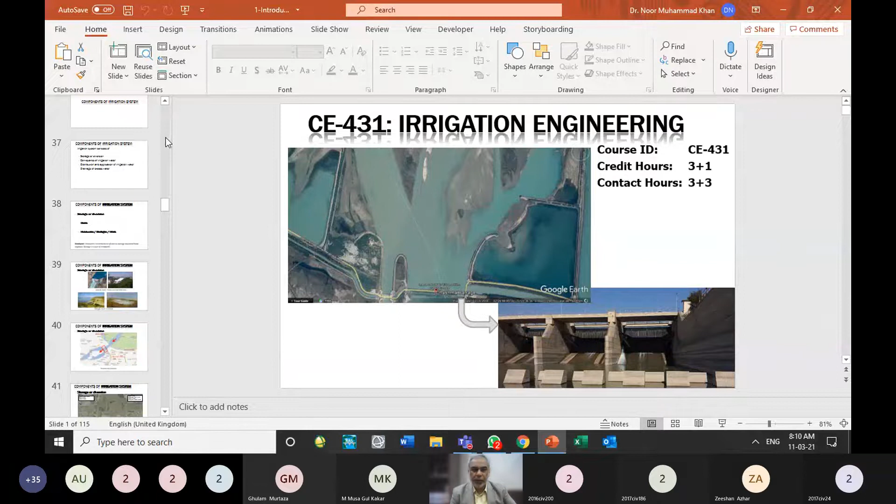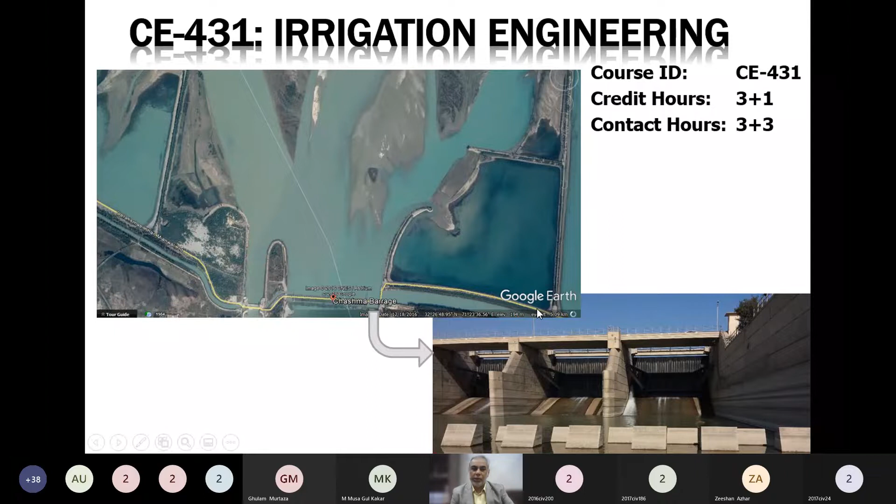Up till now we have focused on the importance of irrigation. We have tried to inform you, and we have linked irrigation with the economy of the country, with the need of the society, with the need of the population living in a country with respect to their food requirement, their fiber requirement, and their clothing requirements. So we need agriculture. Agriculture can survive if sufficient water is available. If sufficient water is not naturally available, we have to go towards irrigation, which we define as artificial application of water.

We have informed you why irrigation is required in a systematic manner. Main reason is for sustained growth of agriculture, and why we need it. Reason is non-uniform rainfall with respect to time and with respect to location.

We have told you that irrigation is provision of water, and provision of water...

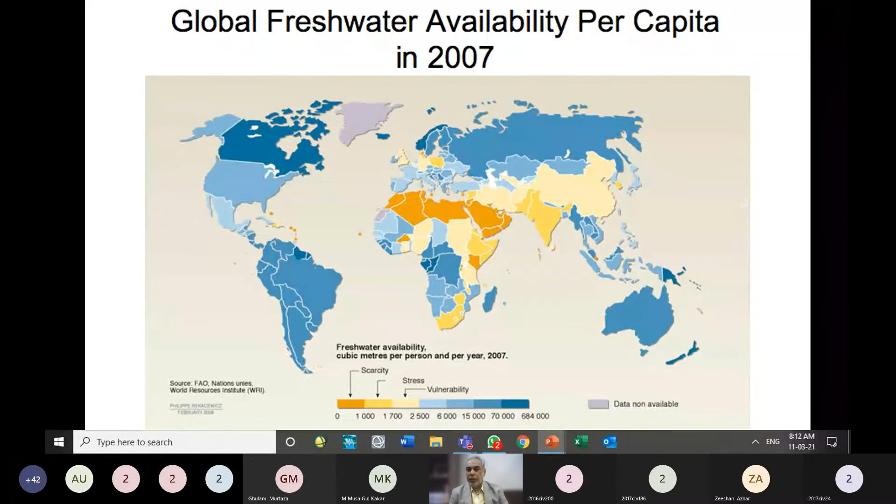So we have informed you that irrigation depends upon water, and water is not available in unlimited quantity. It has a limited quantity. So we have to be careful while using water for any purpose, not only for agriculture purpose.

We have also informed during the discussion that there are three main stakeholders. We have told you that there are three main sectors in addition to the fourth sector of environment. There are three main sectors which are users of water: agriculture, urban water supply, and the third one is the industrial sector.

So each sector needs to look into careful use of water, so that water should not be wasted. In the urban supply sector, you can see our habits of using water without considering its value for the person who is short of water. We keep our taps open while doing other work. We keep our lawn pipes or lawn hose open without taking care that we are using fresh water, which is not easily available to a big population of the world.

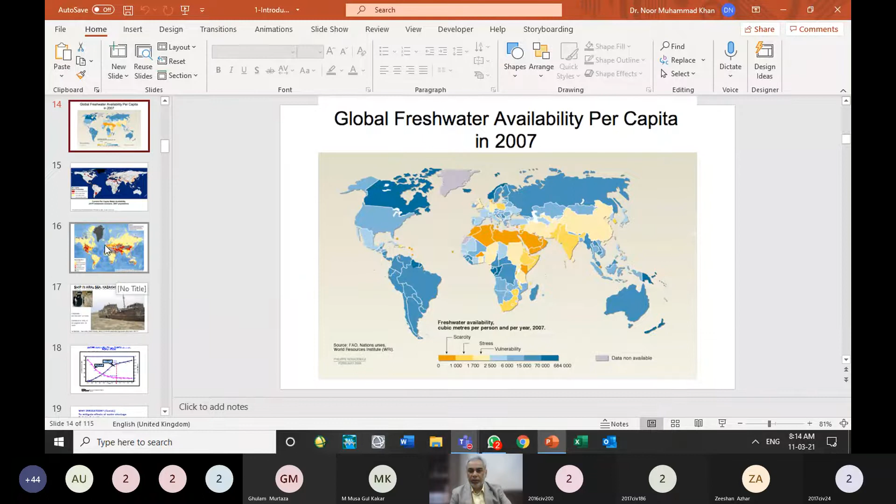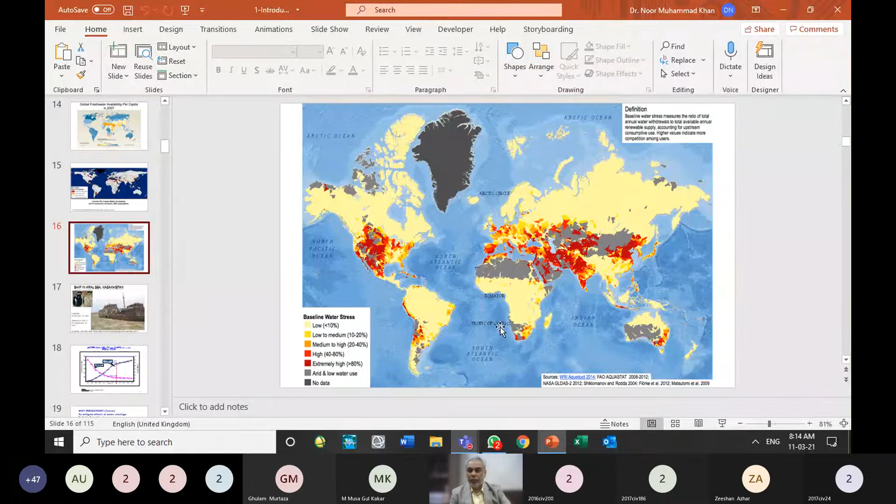So we should be careful in our daily life. We should be careful as a nation also. We should not be losing water. Wherever possible, we have to conserve water. We have to reduce our demands, because unlimited supply of water is not possible. There is a limited supply of water. You were informed about the habits of using water all across the world. For example...

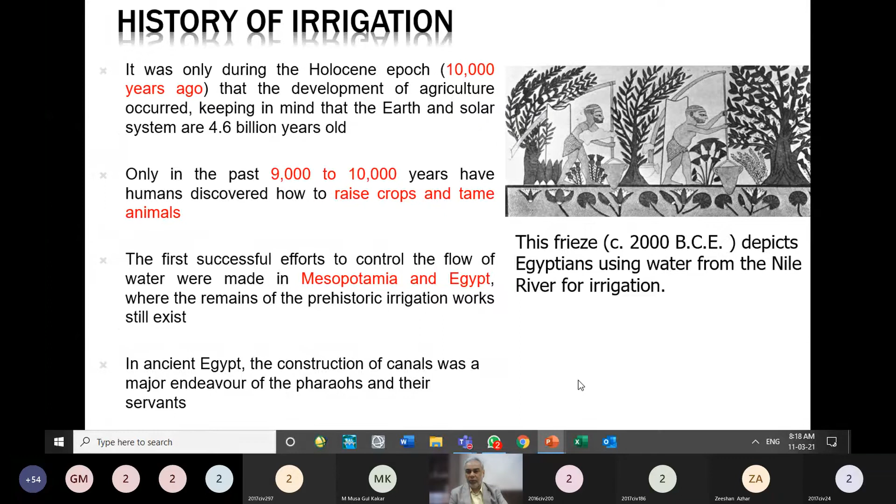So those were the messages conveyed in the last 2 weeks, and you were informed about merits and demerits of irrigation. Historically, a small review was carried out that informed you irrigation came into existence once agriculture was practiced, and after that, when they found agriculture cannot sustain without nature, without application of water, they went towards irrigation.

So when they thought about irrigation, they had to divert water and make canals. Historical findings tell us some civilizations stopped the river, stored the water, and diverted it into canals - we consider that a way towards the irrigation system. Those historical facts - where was the first dam constructed, who were using canals - have been informed to you. We have found old civilizations like Egyptian, Mesopotamian, Indus Valley, and civilizations in China and other countries had started using methods of irrigation as old as 4,000 years from now.

We have found evidence of using Qanat irrigation system as old as 700 BC, about 2,700 years ago. You have been informed that people were using canals and dams for diverting water. Canals and dams were built as old as 4,500 years ago.

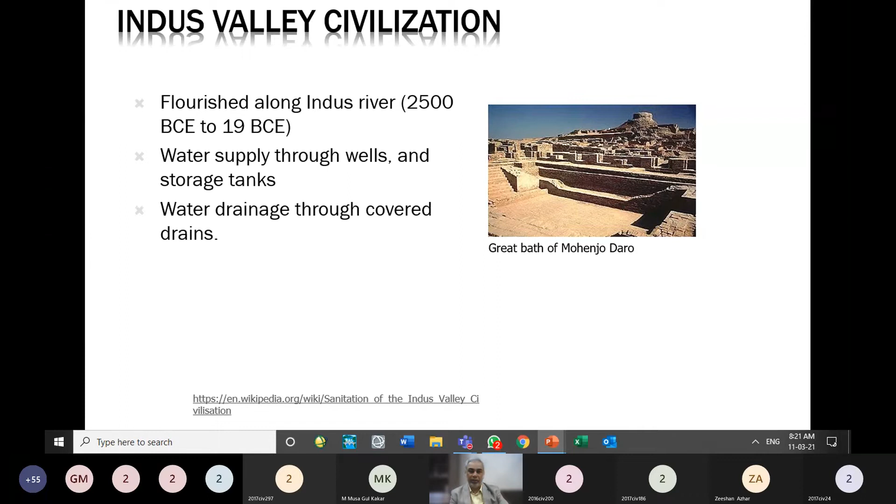This modern civilization, which we see now, started in the 19th century. In the 1800s, we see the construction of large canals in Indo-Pakistan, 1836, something like that. So that was informed to you.

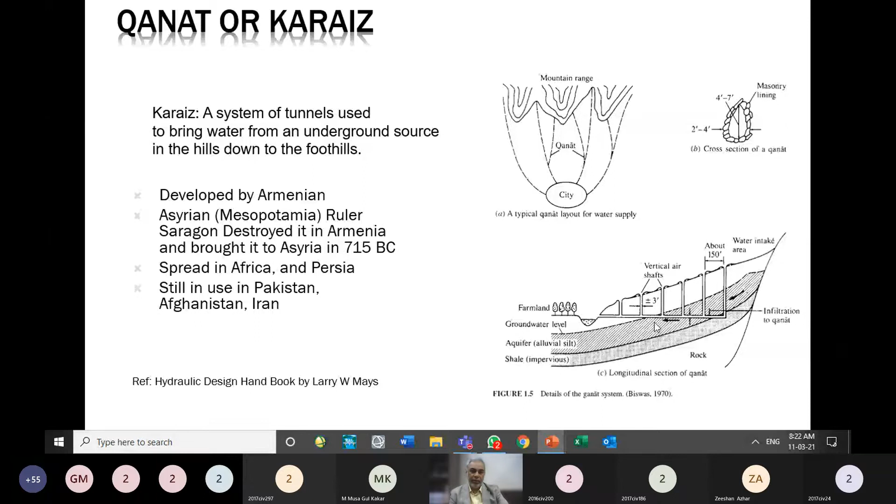A very good and water conserving system with the least evaporation losses is the Qanat irrigation system, which uses underground tunnels to link the aquifer with the water demand area. The aquifer was connected with the land where water had to be applied, with the help of a tunnel constructed by physically digging it. They used to clean and maintain it with access points called vertical shafts, used to access it and keep it clean and maintained in its desired shape.

Such kind of evidence is 100-200 years old and can still be found in village environments today. You can see this, we call it a Persian well, using animal power to lift water from wells where the water is at a lower level, so they lift the water. Now most of them have been replaced with mechanical power or electric power supplied wells, which we call tube wells, or wells powered with a diesel engine, which we call a Peter engine.

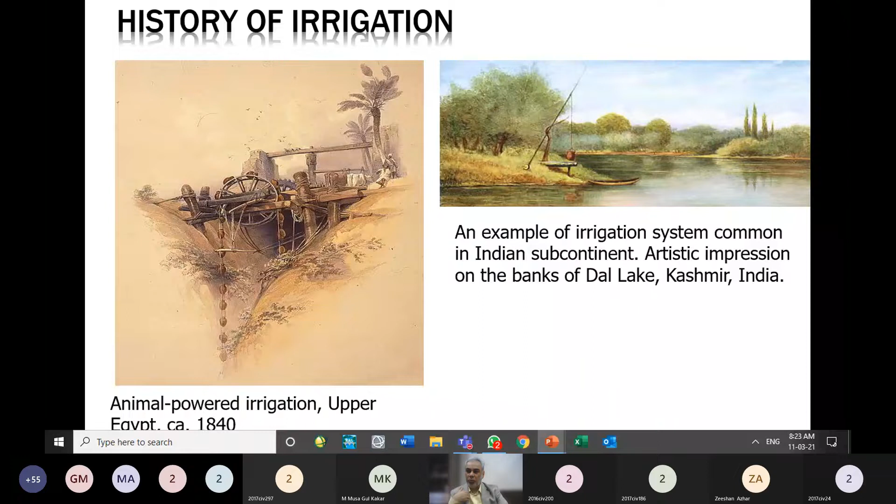People have also lifted water with human power using the lever concept, and they used to call it a shaduf, as seen in old historical pictures. We have seen people lifting water to irrigate gardens and the surrounding land.

Today we have to tell you about different components of irrigation whenever there is an irrigation system. It will consist of three or four main components. Before that, if I go towards the types of irrigation, mainly irrigation can be divided into two kinds: one we say is surface irrigation, and second we say is lift irrigation.

Surface irrigation can also be called gravity irrigation. So we can divide the method of irrigation or irrigation infrastructure into two kinds: one we call the gravity irrigation system, and one we call the lift irrigation system. In the gravity irrigation system, the gravitational force, the force of gravity, makes the water run through the canals. This gravitational pull of the earth makes the water run in the canal, and that gravitational force is available all the time.

We know gravity is there all the time, but it makes water start running when the topography or the channel has a slope in one direction. If the channel is horizontal or the land is horizontal, water doesn't start moving because gravity is only pulling it downward. If the surface is horizontal, gravity is always applied on that water too, but it will only pull downward, so it will not start moving.

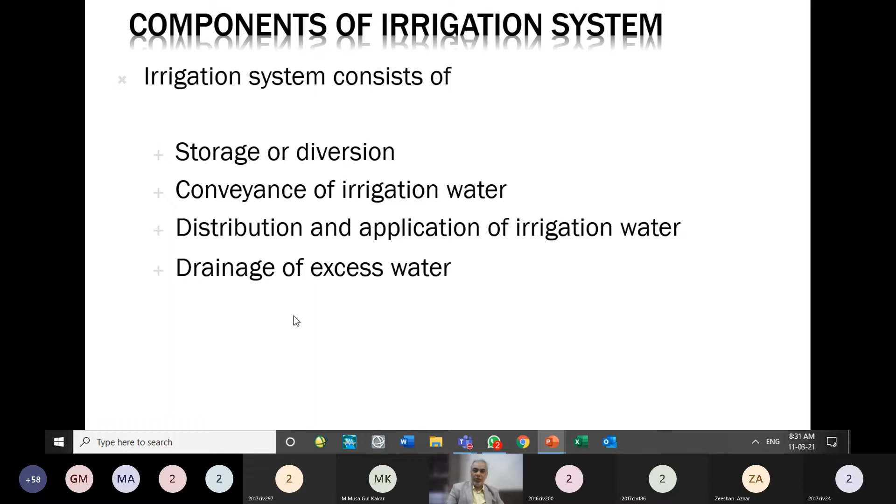So, the four components, I again emphasize: a source of water; conveying infrastructure; some rules and regulations for distribution of water; and a drainage system in that area. A few decades ago, we did not have drainage systems, so we faced the problem of waterlogging.

Storage and diversion. Please tell me if I have already covered this, because I forget whether I have covered it or not. Anybody, CR, have we covered these slides or not? Who is with me? Roll number 11, 2016 Civil 11. Please unmute your mic. Yes, sir. Can you tell me if we have covered this component of the irrigation system in the previous lecture or not? Sir, I was not there in the previous lectures, so I won't know. Very nice. Roll number 17, 11. 16, 11 was not there.

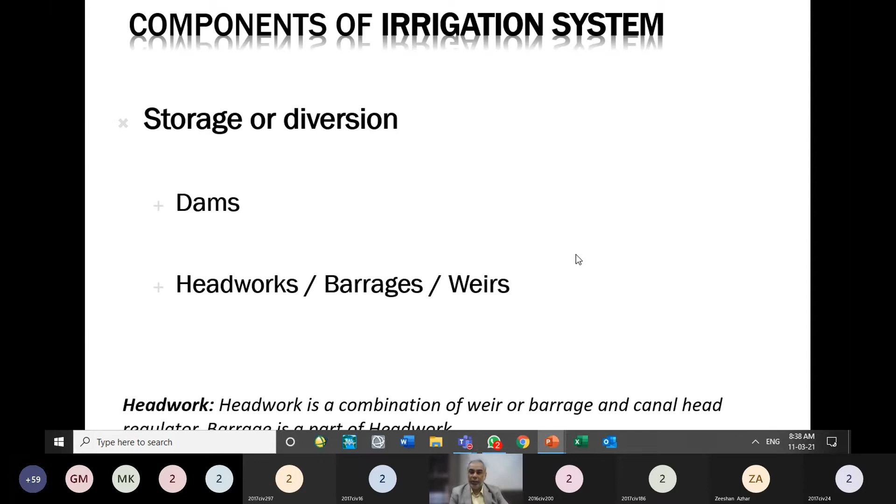So, a few figures on the storages which we have in Pakistan. For irrigation purposes, for the Indus Basin irrigation system, we have three main storages. We have many small storages, but those provide water locally. These three main irrigation reservoirs are Tarbela Reservoir, Mangla Reservoir, and Chashma Reservoir. Chashma is actually a barrage, an exceptional kind of barrage in Pakistan. There are about 17 or 18 barrages in Pakistan. Chashma is exceptional in that it has a small storage capacity also.

Originally it was 0.8 million acre feet, and now it has been reduced to 0.33 or 0.34 million acre feet at the moment. For Mangla and Tarbela, the upper figure is Tarbela. These are also structures built on Tarbela dam. These are spillways, and here is the spillway in working condition. And this is a plan view from the satellite of the Tarbela dam. Here we can see the two spillways. Here is the embankment or barrier which is obstructing the flow, and it is, I think, more than 100 meters high. So it has created a reservoir on the upstream side.

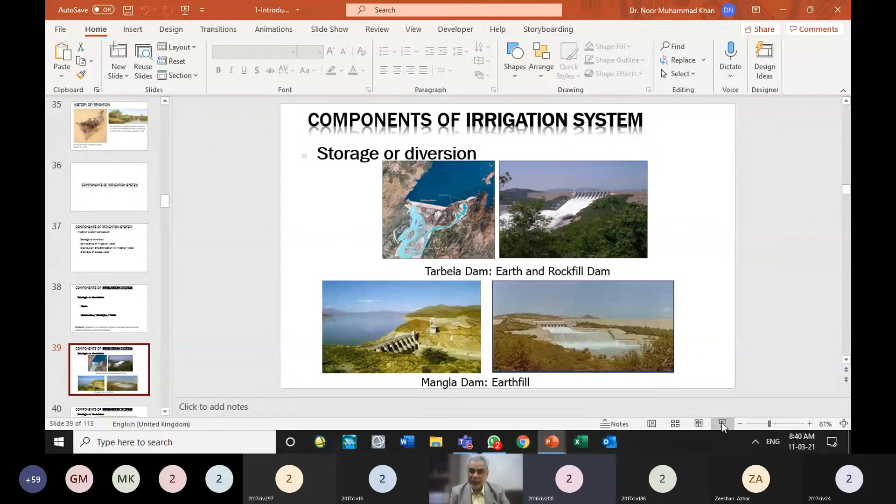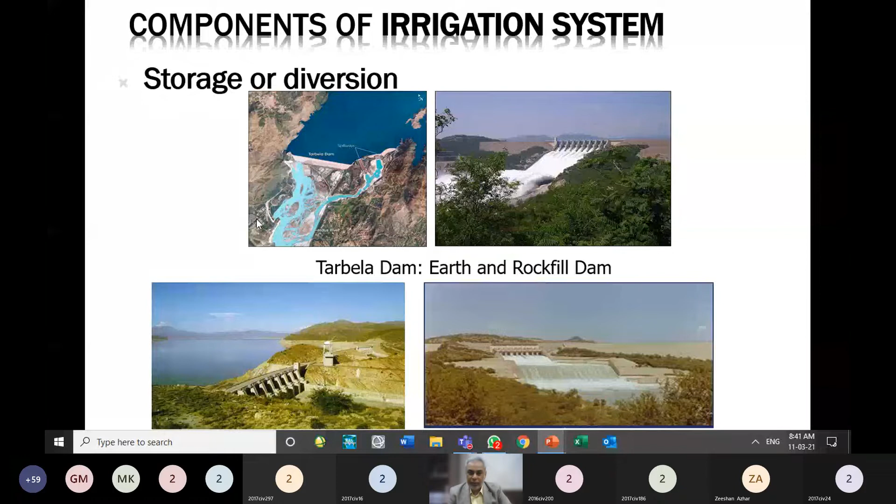This one is... someone must know it, GIK, we call it Ghulam Ishaq Khan Institute. Yes sir. And so that is placed over here on the right bank. You can see while you are in the campus, I think you can see this dam also over there. And when hydropower tunnels are working, there is a good view for that tunnel. Splash of water can be seen over there. So that famous university is located on the right bank of Indus, just downstream of the Tarbela Dam.

Here is the Google image for a diversion infrastructure for irrigation. That is the Marala Barrage. Those who are living close to Sialkot area, they must be knowing about it. Marala Barrage, just at the line of control or at the international boundary, I think it is there. The boundary between Pakistan and India is called with two names. One is the international boundary, which is near Lahore and Sialkot. One boundary we call not international boundary, we call it the line of control. So I think line of control is over here. This part is occupied Kashmir, and over here we have the Sialkot area.

So water from the Chenab River enters into the Pakistan territory over here, and immediately when it enters into Pakistan, a barrage is constructed over here, which is called the Marala Barrage. Two main canals take off from it. One canal we call UCC. You should write its name, Upper Chenab Canal, UCC, and another canal is called MR Link Canal. When you will be studying the Indus Basin irrigation system, you have to recognize major canal systems close to your area where you are living, major canal systems which are supplying water to the areas surrounding our UET and Lahore region, and major canal systems of your interest.

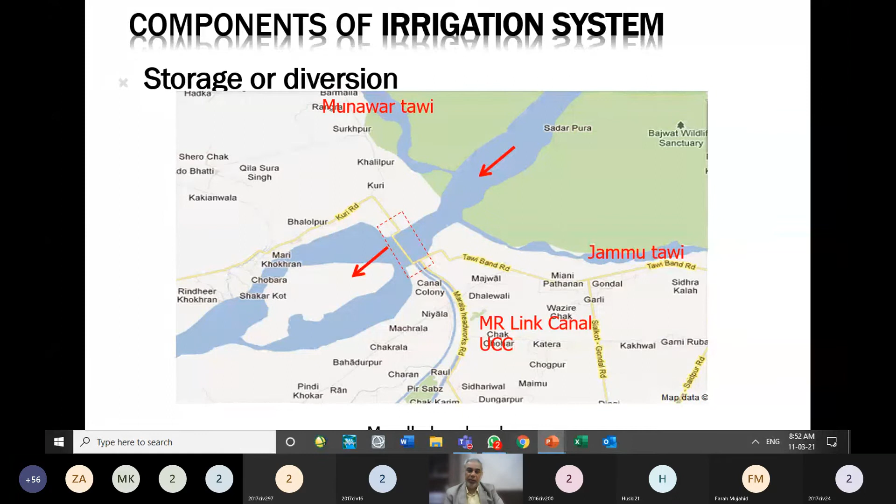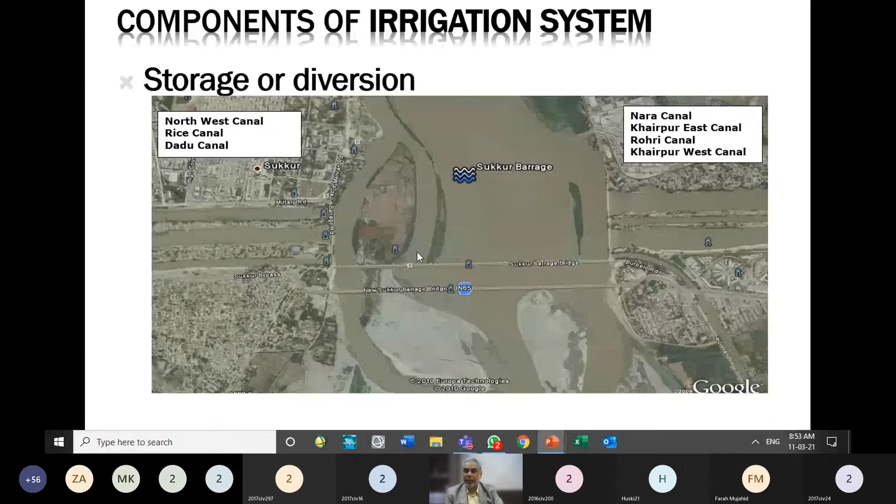On the right bank, after the Indus passes through the Sindh area, some area of Balochistan is irrigated with the barrages in Sindh. From the Guddu barrage, I think, which is the barrage upstream of this Sukkur Barrage, some area of Balochistan is also fed. So this is the largest barrage in our irrigation system, and the second last barrage on the Indus River. Downstream there is one more barrage, we call it the Kotri barrage.

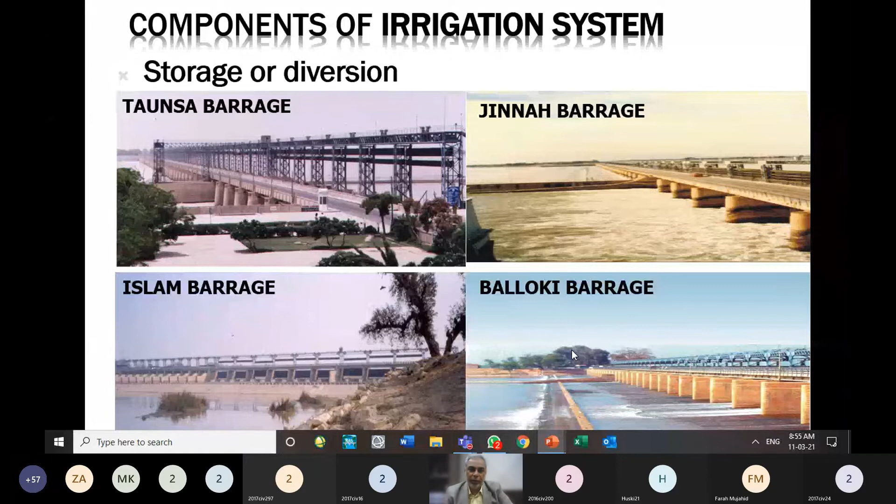So Balloki barrage has two canals on the left bank side. One they call the Balloki Suleimanki Link Canal, the BS Link Canal, and another is the irrigation canal, they call it LBO, not LBOD, what do they call it, which goes towards Khanewal and Sahiwal. Anybody remember this canal, the canal taken off from Balloki? Okay, maybe the next slide will have its name. I forget it.

Here is the weir part. We have the slope of the weir on the downstream side, and we will have the crest somewhere, which is hidden from here now. There will be a top of the weir, we call it the crest, and there will be an upstream side. Usually we provide trapezoidal weirs. In addition, there are piers or columns installed that support the gates. When they want to stop the water in the river, they close the gates. Those gates are supported on these piers, and these piers also support a bridge if there is one at the top.

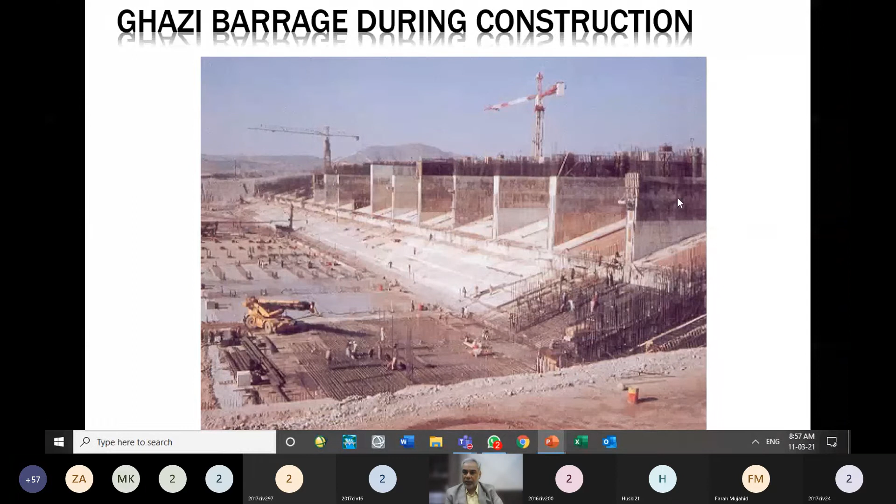If we don't have the bridge or the gates, we will have only a trapezoidal kind of structure, we call it a weir. If we want to install gates, then we have to make these walls or piers there. So in addition to this source or area from where we supply water, water is first given to a big canal, we call it the main canal system.

Water is coming to that main canal system, and after running a few kilometers, usually tens of kilometers, it divides into two or three canal systems, small canals; we call them branch canals. And from each branch, there will be other small canals taking out; we call them distributary canals.

And from each distributary, either we can supply water to the farmland or the farmers through outlets, or from a distributary we can take out another small canal, we call it a minor, and then the minor will supply water to the farmers through the outlets. Outlets are the structures which convey water from the state-owned distributary or minor. State-owned means that canal which is owned by the government. So an outlet is a structure which conveys water from a state-owned distributary or minor to the farmer-owned water course.

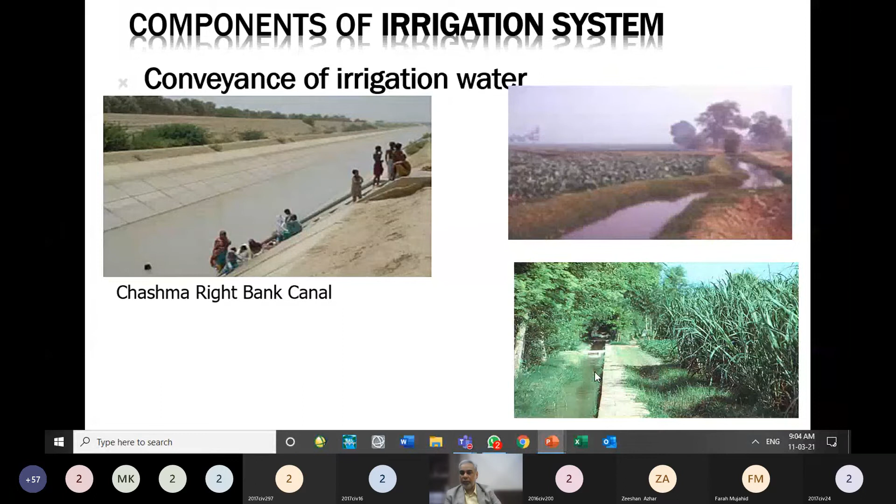Here is the water course, and it seems to be a lined water course going into a farmland. On both sides there are agricultural fields.

From the water course, water is applied to the field with the help of a structure which we call a turnout. In local language we call that a nakka.

Previously we did not have such a concrete structure there. Previously, when water courses were unlined, when the water course was only an earthen channel made simply of soil...

When concrete lined water courses were not there, people used to get water out of the water course just by cutting the bank.

They used to cut the bank and get the water, and when a field was sufficiently soaked, they would close that bank again by putting soil over there.

But now, when the water course is lined, they have made concrete structures with an opening inside, and that opening can be closed with a cover-like structure, like a manhole cover, a plate that can be removed or placed there.

If they want water, they remove this cover plate and the water goes into the field. If they want the water to go downstream, the cover is placed again.

The distribution of water is mainly done with a system we call Warabandi in Pakistan and India. Warabandi is the local name; in English we can call it a rotational allocation of water.

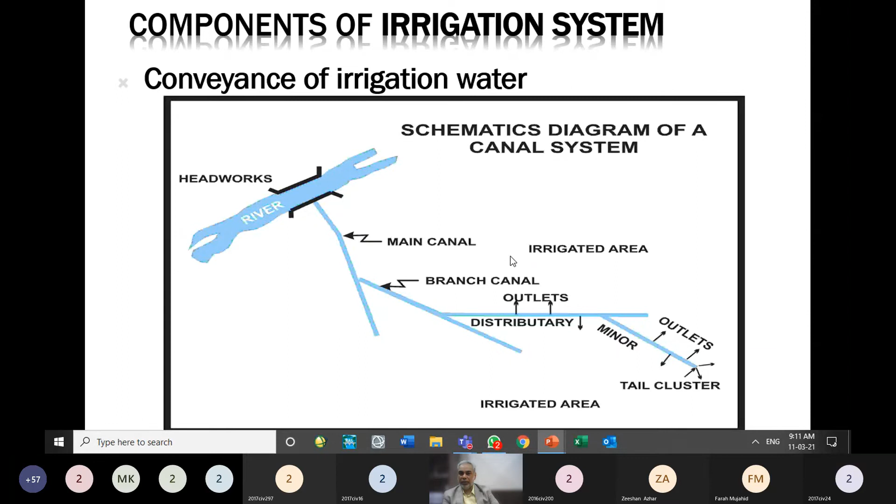That is related to this irrigation system. One outlet will be having a certain number; each outlet is given a certain number. So the area fed by that outlet is called with respect to that outlet number, and we say this is chak number so-and-so. That links you to the local terminology and local utilization.

Application of water is also part of this irrigation system. Different methods of application of water have been utilized in gravity irrigation systems. We use surface irrigation methods like flooding and furrow, which are usually utilized in gravity irrigation systems. If we have lift irrigation or pump irrigation systems, then we use sprinkler irrigation, and another type of pump irrigation system is called drip irrigation system. So one of these ways of application of water to the field will be used.

Once water has reached the farmland, we usually use the flooding method or furrow method to apply water to the plant itself. If we have a gravity irrigation system or a pump installed to supply water to the field, it can be applied with the flooding or furrow method, or we can continue that pipe and supply water to sprinklers, which becomes a sprinkler irrigation system.

Or we can supply water to a pipe system which has small openings inside it, like small emitters, which provide water drop by drop to the area surrounding each plant. That system is called a drip irrigation system. When we supply water to the root zone surrounding a plant drop by drop, we say this is a drip irrigation system.

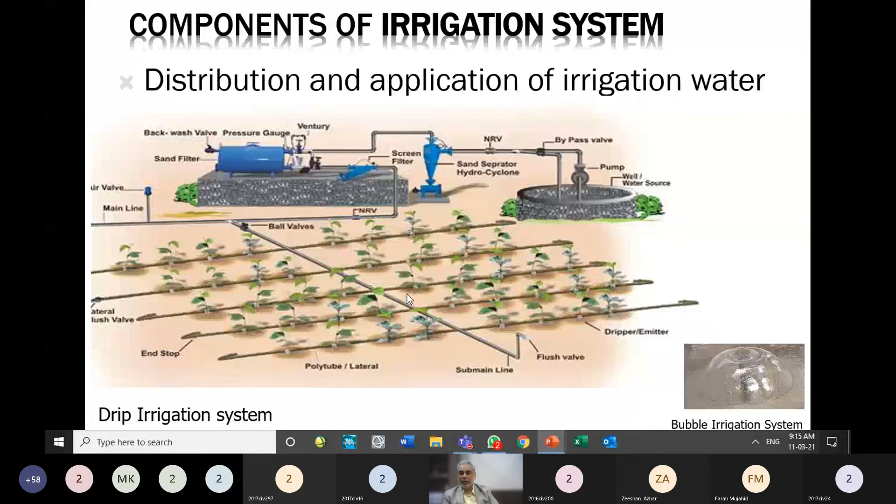Drip irrigation is considered most efficient, with more than 90% efficiency achievable. Sprinkler irrigation can achieve about 70-80% or more efficiency, and furrow irrigation reaches 60-70% efficiency.

The least efficient is the flooding method, where we open a channel into a field and the field is flooded freely, called free flooding. This causes more evaporation, more percolation, more losses, and less efficiency, but it is the least labor cost method of water application.

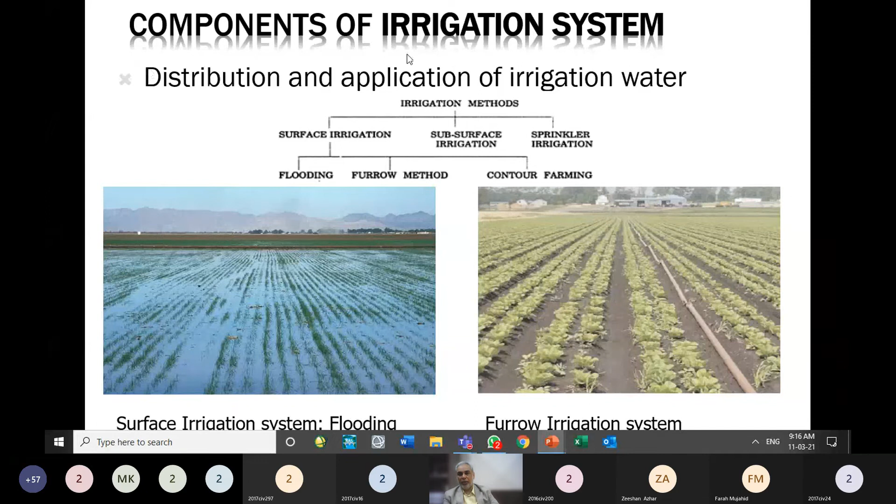So we started from the infrastructure which we need, and now we are telling you about the way of application in an irrigation system and the rules of allocation. This comes under the component of method of distribution and application of irrigation water.

Sometimes the land area is sloped for agriculture, so this method is utilized called contour farming. We make terraces step by step, small fields at the same level, then the next field at another level, and so on.

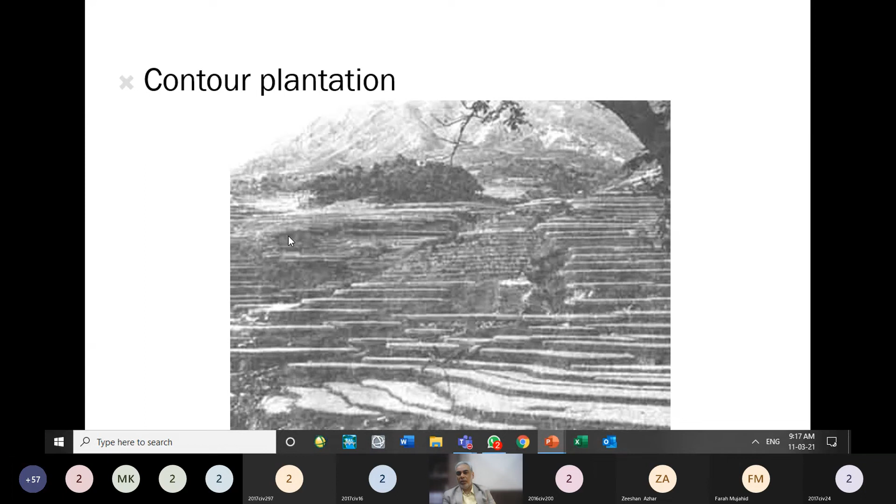Usually we don't have irrigation in this area; gravity irrigation is not used here. Sometimes natural rain-fed agriculture is done, or sometimes sprinkler irrigation is used. Most of the time on hilly areas we don't need an irrigation system since rainfall is sufficient, but if a place has good groundwater, they can use a pump system and sprinkler system to irrigate this area.

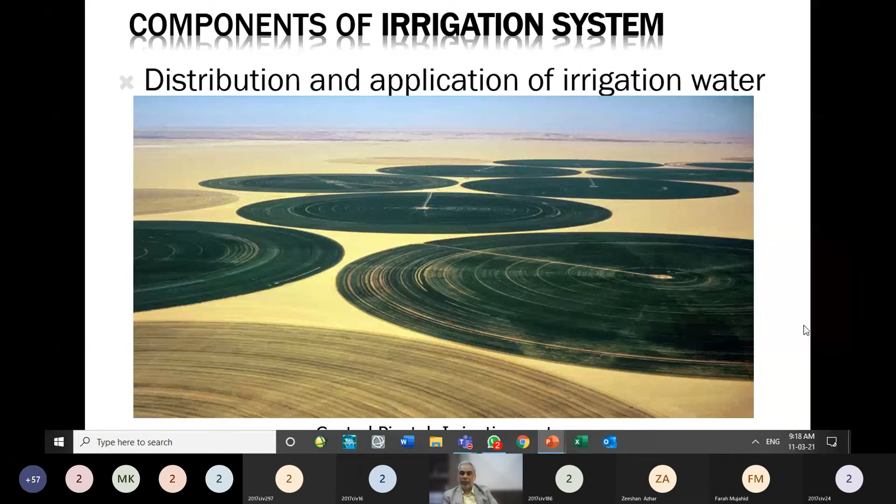Water emits from the sprinklers, and as it rotates it feeds water to this circular area. If we see this from satellite, we see pictures like this in an area fed through the pivotal sprinkler irrigation system.

This is a picture from Saudi Arabia, a desert area. Because they have a shortage of water, they use sprinkler irrigation, specifically pivotal irrigation systems, creating a landscape that looks odd compared to other areas. The background is sandy, but wherever they have water, they have changed the land use to green areas.

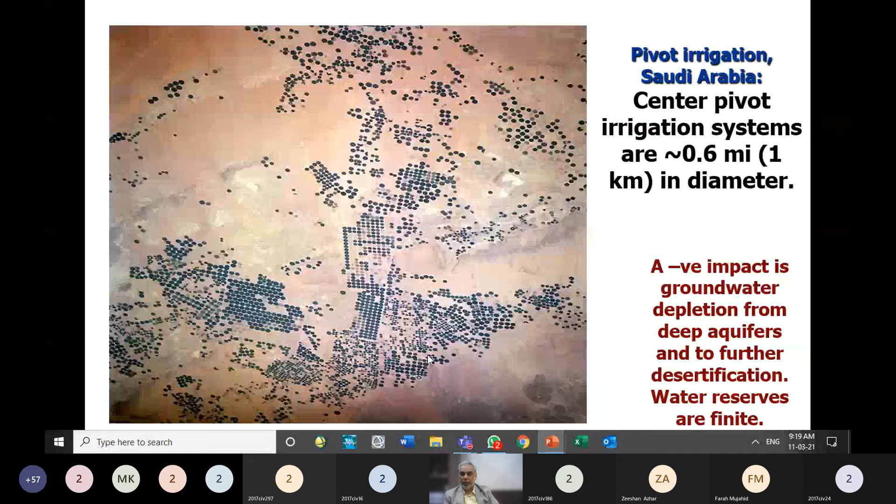So we have to provide either drainage ditches or drains on the surface, which we call a surface drainage system, or we have to provide a subsurface drainage system, which we call a tile drain. This subsurface drainage system usually has perforated pipes laid under the ground level. We lay them 4, 5, 6 feet below the ground, and it has perforations.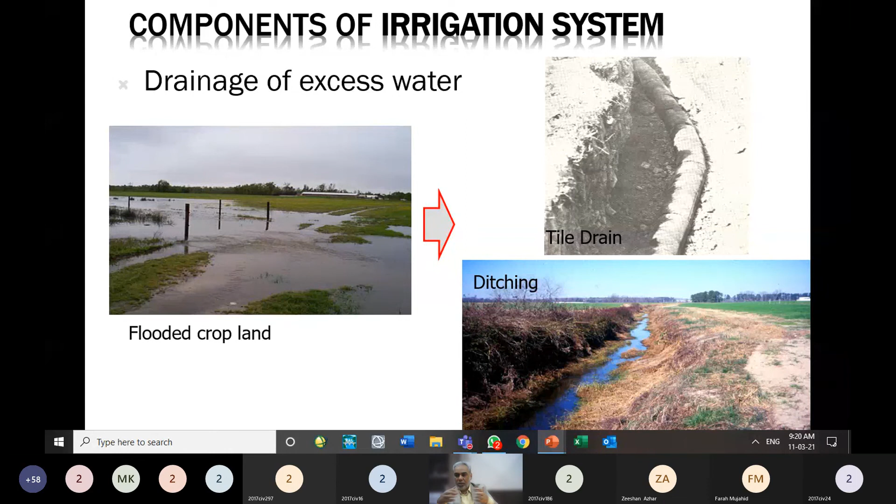Instead of surface drains, if we close this one and provide a tile drain here, a pipe that has perforations or openings, and we cover that pipe with some good filter material so that those perforations are not clogged, then a similar kind of action will occur. A higher groundwater table will put water in that perforated pipe, and that perforated pipe will take the water to the sump or some other area. So a tile drainage system can be used.

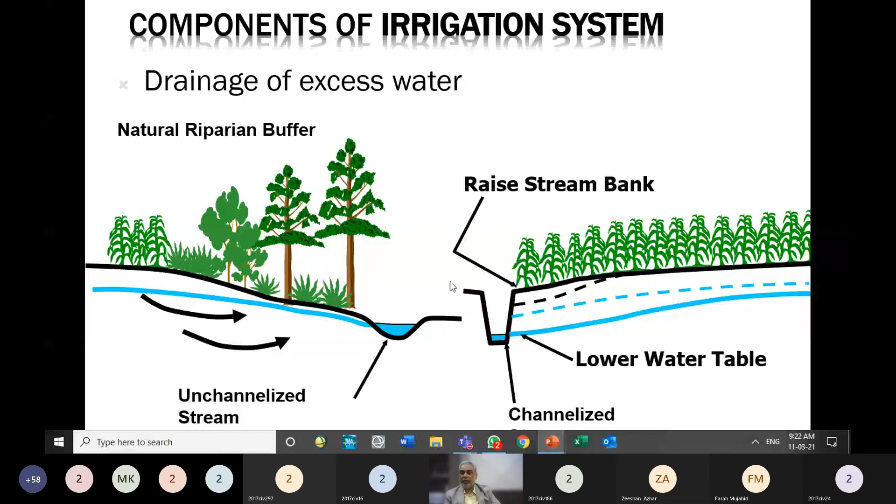You should understand the difference between the surface drainage system and the tile drainage system. Surface drainage systems are open to the environment. They are like open channels, while tile drainage systems have pipes which are not visible. They run underneath the ground and take water away from that area efficiently. The benefit is we don't lose land from agricultural activity. Those drains are underneath, and we can carry out agriculture at the top. Of course, the cost of the tile drainage system is larger compared to the surface drainage system.

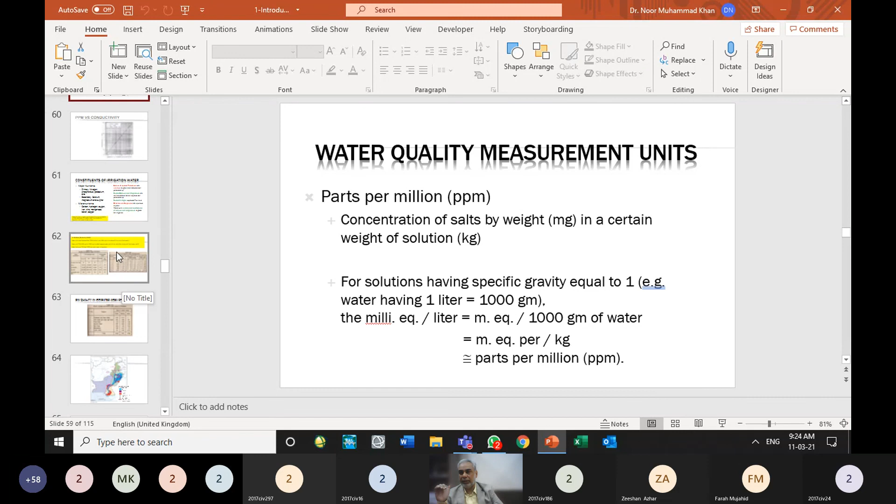Then we will talk about the water quality parameters in an irrigation system in an agricultural environment. We will not be talking about water quality standards for drinking purposes. That you might be studying in environmental engineering. We will tell you the water quality standard required for agriculture, how much area is underlain with which kind of groundwater quality, and what units we use to measure water quality. We will talk about this for 10-20 minutes.